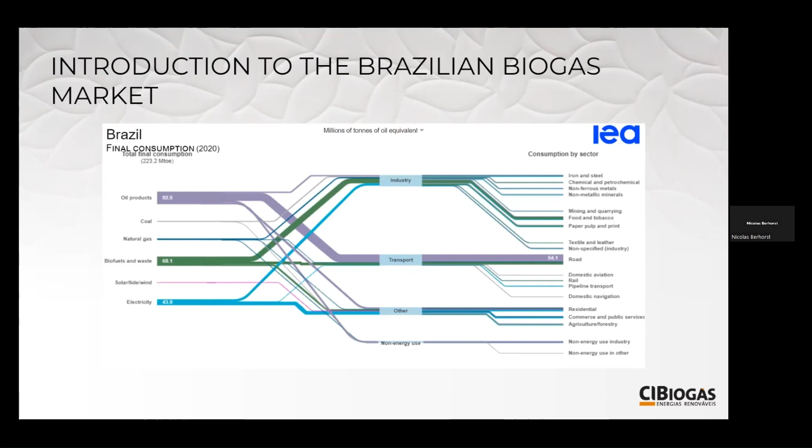And how does biogas fit into all of this? These are some pictures of the biogas outlook that CIBiogás has produced, also available at the BiogasWorld website. Last year, 2022, in comparison to 2021, we've seen a growth of 15% in new plants and a growth of 22% in biogas volume. Where are these plants mostly concentrated?

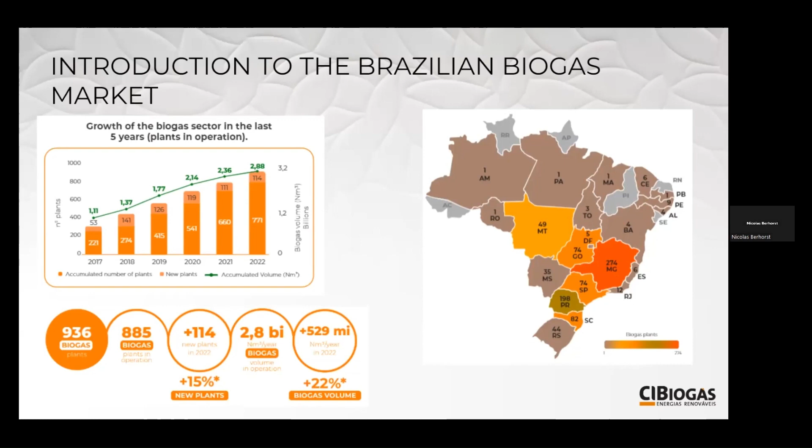They are mostly concentrated where Brazil produces its protein - south, southeast, and center west. On this slide I'd like to show some profile of those plants. Please check the slide on the right, the green one. The first bar, dark green, shows the quantity of plants, and the lighter green shows the volume of biogas produced. Looking at opposite sides, on one hand we have agriculture, which represents almost 80% of all the quantity of plants in Brazil, but counts for only 10% of the total biogas volume produced.

And on the other end, we have sanitation, mainly municipal solid waste and wastewater treatment plants, which counts for only 10% of the quantity of plants, but roughly 3/4 of the whole volume of biogas produced in Brazil. And in the middle, we have industry, and I would like to highlight this sector.

This is where CIBiogás believes we will see the most accelerated growth in Brazil, mainly in food and beverage companies and the sugar ethanol industry, where we use sugarcane crops to produce biofuels and sugar, plus other plants like slaughterhouses or enterprises that produce organic residue. This middle segment, 12% of quantity and 16% of volume, we expect to see accelerated growth both in quantity and volume, due mainly to the type of stakeholder.

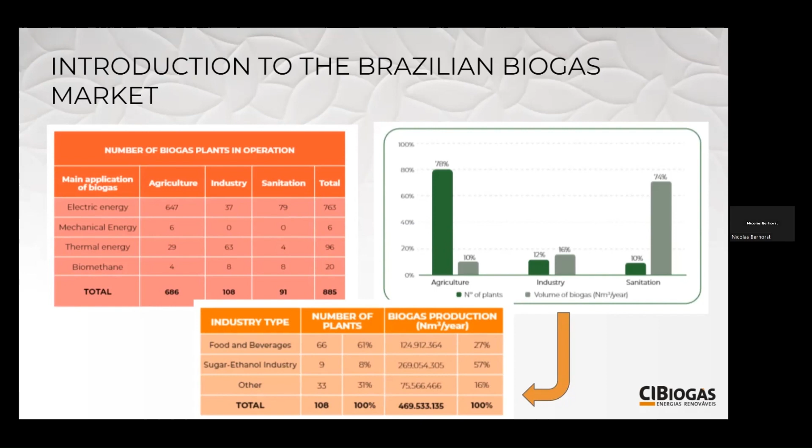Next, I bring some strategic importance to the biogas chain in Brazil. When I talk biogas, I mean the whole derivatives: biomethane, hydrogen, methanol, airplane fuel, hydrocarbons, fertilizer, etc. These are some main key points: portfolio diversification, new income, new exports, competitivity, dispatchable energy, energy security.

Sometimes in Brazil we suffer from drought, from lack of rains, and we suffer from power shortages. The Paris Agreement targets methane emissions, and mainly we have a specific public policy for methane emissions. And also keep in mind, we are the... oh, now my video is back.

Hello everyone. So keep in mind, Brazil is one of the largest protein producers in the world, so methane emissions from this sector is something very important to be taken into account.

We're also talking about import substitution and price fluctuations due to the international market. We import almost 100% of our phosphate fertilizers, and we also have an important share of imports from Bolivia of natural gas and also liquefied natural gas.

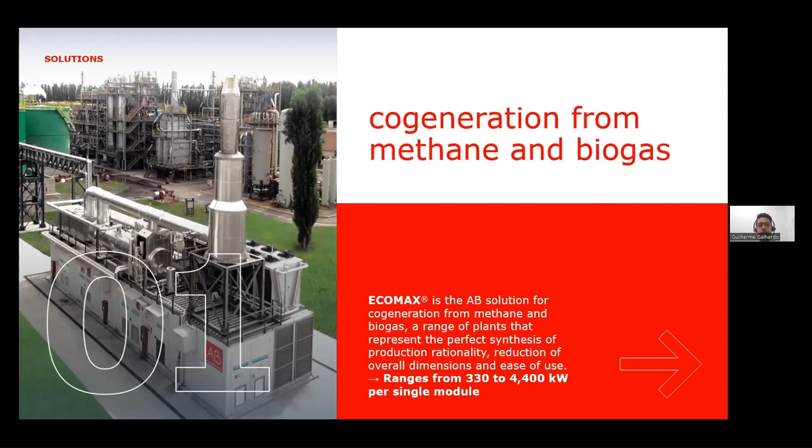Just going fast into our solutions, we have two types of solutions for the biogas market in general. The first one, which is the one we started with, is cogeneration using engines that run with biogas. In this solution, we go from 330 kilowatts up to 4.4 megawatts for a single module, and of course we can configure and use the modules according to the needs of the customer.

As it is a very plug and play solution and a very simple solution, we can install it according to the needs of the project. We can basically do it with whatever gas you have - natural gas, biogas, landfill gas, and also some special gases. Here in Brazil, as I said, we already have a lot of experience using biogas, especially landfill gases.

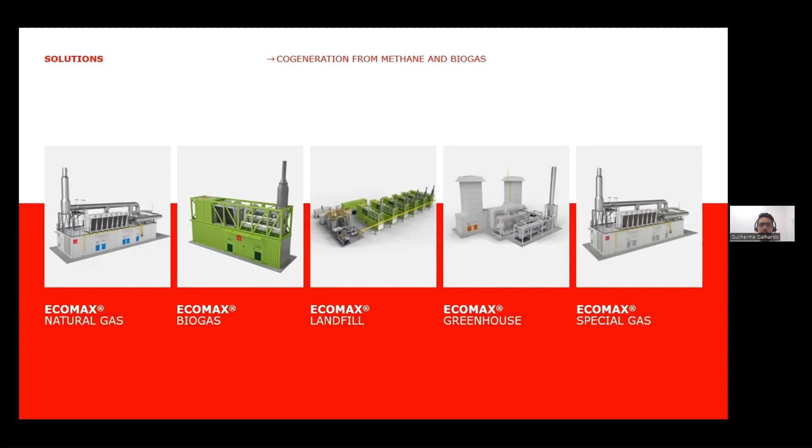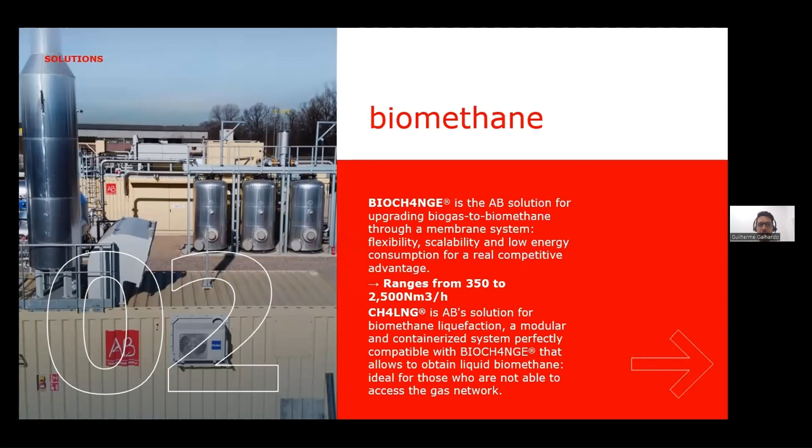In the past years, we used to say that we worked with solutions for energy generation using biogas, but now we say that we work with solutions for the utilization of biogas, because besides energy generation, we also have upgrading systems. So basically, AB is a company that can support you in the complete project, even if you want to use the biogas for energy generation or for biomethane production.

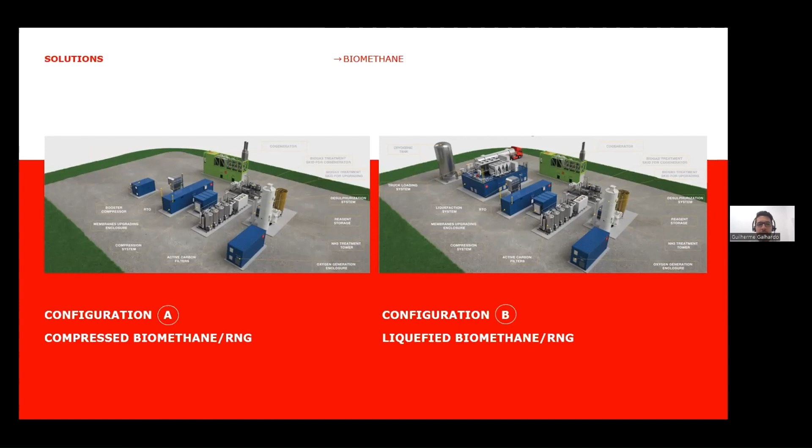We are basically, and we like to say, a one-stop shop. So wherever you need biogas utilization, we can, in one way or another, supply and make a project for you. Besides the supply of equipment, of course, there's a very important part, which is the operation of the systems.

Just as an example, we have it worldwide, but here in Brazil, 100% of the projects we have installed have full service agreement contracts with the customer, where all spare parts and all maintenance, all services, are included in this contract. We have the team available 24/7 to the customer.

Whenever you need, we're there and we can support. And into this contract, we have a minimum availability of the systems - it's an availability warranty that we supply just to make sure to the customer that the engine or the upgrading system will run according to the needs of the project.

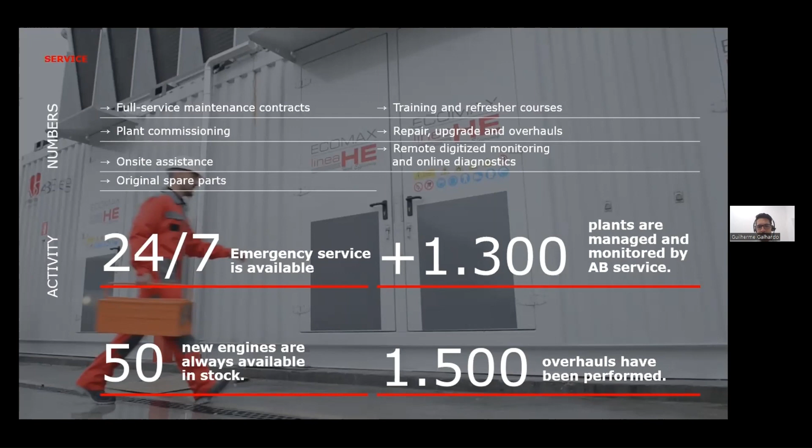So basically, this is just a short, very short introduction. Going into the challenges and opportunities, I think Nicolas explained it in a very good way, and we just highlighted some points here that we see. This is mixed between energy generation and biomethane production in general. In Brazil, when we talk about biomethane, this is a kind of new thing right here - the projects have been developing more and more in the past 2 years, I would say.

One big challenge for this market is the infrastructure for transport. You have the feedstock, you have everything, you have the technologies, but sometimes you are producing the biomethane, but you cannot transport it, or it's very expensive because you have to compress it or liquefy it.

If we take a look at the experiences we have in Europe, basically all the installations are very close, or they are just beside a gas network, so it's very easy for you to connect the biomethane and transport it.

We don't have as good public policies and incentives. This is something we need to develop. And as Nicolas said, the ones we have are not applied. So this is a big challenge for us.

Morning, everyone. Thank you very much, Brian. Sean, yeah, you will need to click on reading view on your left side. Meeting. Yeah, reading view. One more. Oh yeah, I'm sorry. Okay, here we are. Wonderful, you're good. Okay, thank you very much, Ryan.

Thank you very much to Biogas World for this opportunity to present Bauer to everybody participating, and thank you very much, Nicolas and Guilherme, for your presentations. Very quickly, Bauer Compressors is a German family-owned business based in Munich, Germany. In Munich is where we manufacture the actual compressor blocks themselves. We've been manufacturing high pressure, mid pressure, and low pressure compressors for the last 80 years. We manufacture everything from breathing air compressors to nitrogen, hydrogen, CNG, biogas, and biomethane compressors. Our very first experience in the biomethane, biogas world was in the early 1980s in Europe.

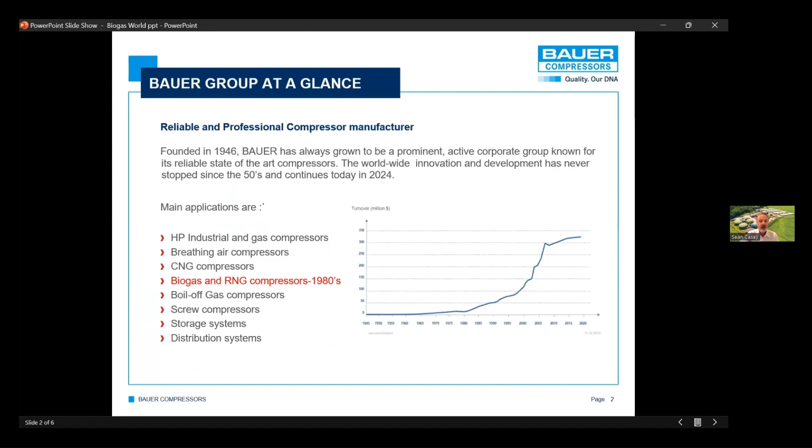And with that experience early on, we've been able to incorporate and accompany all of the changes, all of the evolution throughout the European market. And in the last 4 or 5 years, we've seen a huge uptick in the North American market. I report to Bauer North America, which is based in Norfolk, Virginia. And so we are very busy in our American office right now with a tremendous amount of projects throughout Canada and the United States at the present moment.

As I stated, all of our compressors are made in-house, so we're able to offer and provide a single source responsibility from a manufacturing perspective. We actually manufacture the compressors and we package them according to the customer's requirements.

Americas is responsible for the Brazilian market. I'm the general manager for Bauer for Latin America. I'm based in Mexico right now. I was based here in Brazil for 13 years, but now I'm in Mexico, though I do spend quite a bit of time in Brazil at the present moment, trying to position ourselves for the opportunities. All of our manufacturing is completely vertically integrated, and as such, we're able to fully guarantee and supply and warrant the post-sales support and all the technical support, lifetime support required for the proper operational excellence of the equipment that we manufacture and supply to the customers.

Within the biogas, biomethane world, we've got 3 primary spaces where we participate. The first is in the biofeed gas compressor side. This would be where we would feed the actual biogas to the purification processes, primarily membrane and PSA, where we're very busy right now. We can start as low as 40 cubic meters per hour up to 3,000 cubic meters per hour in flow.

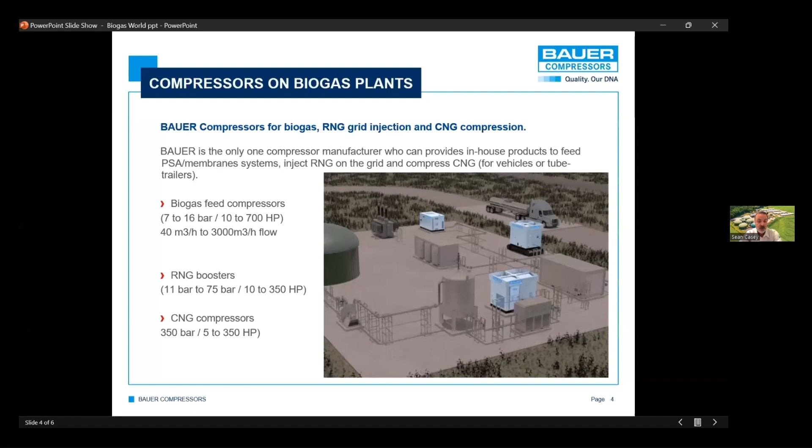Some of the challenges: we believe the marketplace requires more financial incentives, further legislation required to foment fiscal incentives, where we can actually make biomethane scalable. And when you make it scalable, the cost typically reduces, and the exposure and availability of the gas expands at scale. We think the market requires additional lines of financing other than from the BNDES, the Brazilian National Social Economic Development Bank. I look at similar sectors in the Brazilian economy right now as other industries with a lot of PPPs, public-private partnerships, which tend to be fairly successful, a mix of private and public investment. I think if we could do more of that with regard to the biomethane market, that would help tremendously.

We see a few technical challenges.

One of the things that we encounter in a lot of our day-to-day activity is the lack of an independent mid-scale EPC experience in the engineering, procurement, and construction of the upgrading facilities themselves. It's pretty much left to individual specialized companies who are all trying to sell their equipment. But with an EPC, you tend to specialize more on the actual technology itself rather than the specific product. Brazil has a very rich experience with EPCs in the conventional oil and gas world, so we think if we could see more EPC development in the biomethane sector, that could potentially help.

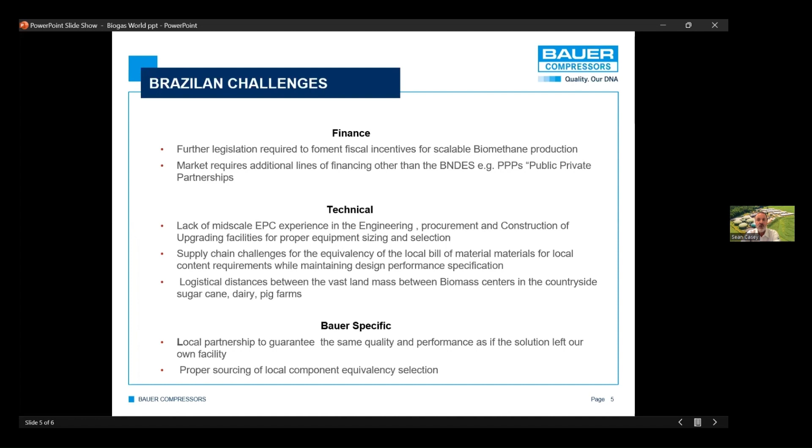Somewhat on the opportunity side, we see some big opportunities for biomethane. I'm not sure if my information is the latest up to date, it's what I could find on the ANP website. Currently we believe there are 6 large plants in operation in Brazil, producing about 62 million cubic meters of gas annually, and there are 11 large plants awaiting final approval from the ANP for implementation.

We see immediate opportunity there for companies such as Bauer to participate at 3 different points. One would be the feed gas, passing the biogas off to the purification processes, whether that be membranes or PSA. There's a lot of talk and focus on the sugarcane and landfill wastewater markets, but we're actually looking at it from a different lens ourselves.

A lot of the applications the US has developed in the last 4 years were heavily geared towards dairy farms, and I know Brazil is a very big dairy producer. We're in the process right now of trying to understand the scale of the dairy production, whether they be cooperative based, but a lot of the European upgraders, that's the first thing they ran after in North America — the dairy opportunities. So with those recent application successes, we're looking at that here right now in Brazil, and we see that as an opportunity for us.

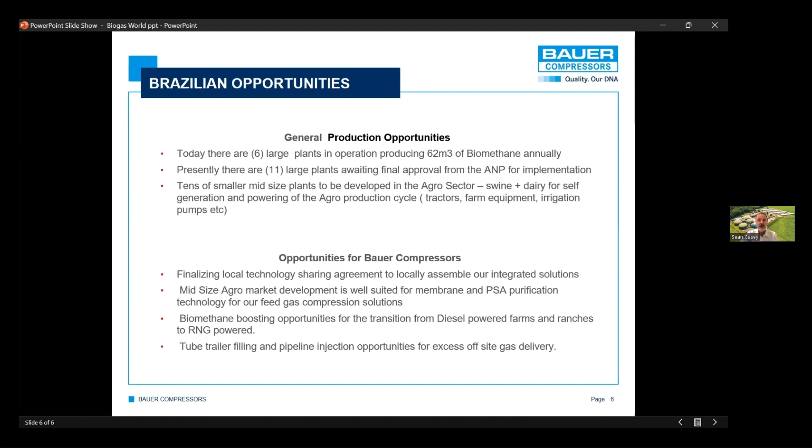Some of the other applications or opportunities we see for Bauer — one that's really important to us right now is to finalize our partnership with a local build company where we can start to offer our solutions locally. The mid-size agro market is well suited for membrane and PSA purification, whereas a lot of the landfill applications are different types of technologies where Bauer itself wouldn't necessarily participate, like water wash and other types of applications. Again, the biomethane opportunities, the transition from diesel to biomethane on the farm, I think is a very interesting opportunity for us as well.

Okay, I'll be even quicker now. So my name is Sérgio Cruz, I'm the general manager for Paques here in Latin America. Quickly on Paques: Paques is a worldwide leader in anaerobic reactors for wastewater treatment. Our headquarters are in the Netherlands, and we have units besides the Netherlands which attends Europe. We have Brazil, which takes care of Latin America, USA in Salem, New Hampshire, which takes care of USA and Canada, India, which takes care of India and Middle East, Kuala Lumpur, who does the Middle East, Southeast Asia, Asia Pacific, and China, doing China. So we're all over the world, almost 500 people. We have done business in 60 countries, and we have over 3,000 references worldwide. And today we belong to the SKion Water Group, which is the same group that owns Ovivo, which is a familiar name to you guys in the United States. I'm based here in Piracicaba, which is about an hour and a half from São Paulo, Brazil.

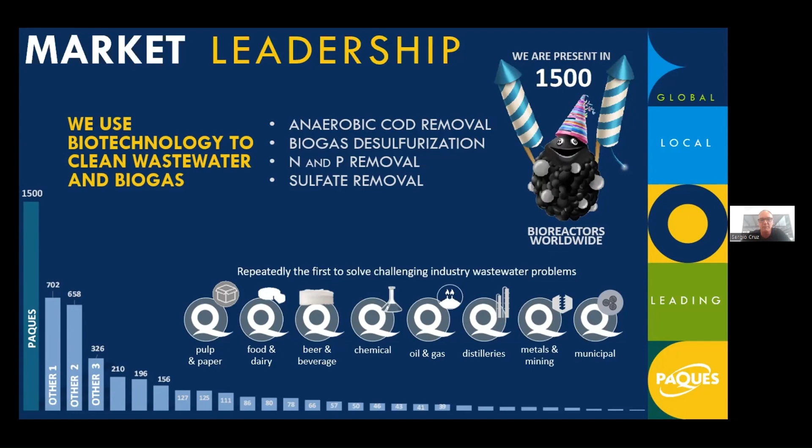So what do we do? Paques uses biotechnology to clean wastewater and biogas. We use, in all our technologies, bugs like anaerobic bugs, Anammox bugs, Thiobacillus, and these bugs do the work for us. Our main business is anaerobic COD removal. We have over 1,500 anaerobic reactors worldwide, being about 300 of them here in Latin America. We're very big on biogas desulfurization as well, about 350 biogas desulfurization systems all over the world, maybe 12 or 15 in our region. Nitrogen and phosphorus removal, sulfate removal. We are in all sorts of different sectors, mainly food, dairy, beer and beverage, pulp and paper, chemicals, and so on. So that's what Paques does.

Quickly on the two technologies that we use for biogas. First of all, of course, biogas generation, especially when we're talking about biogas from semi-solids or high solids concentrated effluents. We have the CBD, which is kind of a CSTR but with a lot of advantages. First of all, we're able to remove the solids that otherwise would accumulate inside the reactor. We have a very unique mixing system; it's actually a plug flow reactor, and we have a very unique system to avoid the formation of scum. And we have an external way of sending the biomass, the sludge, back into the reactor, so we can work with a higher upflow velocity and higher VLR.

So this is our CBD reactor, which we use to generate the biogas. And then we have the

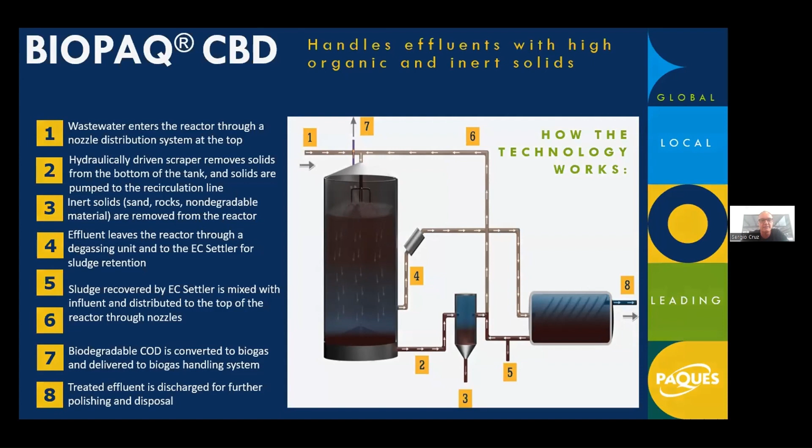THIOPAQ, which is a technology to remove the H2S from the biogas. Basically, it's a scrubber. But besides the scrubber, we have a reactor where another bacteria takes care of it. The H2S is removed from the gas in the scrubber and into the liquid phase. And then in the reactor, we take the sulfide into elemental sulfur. So you not only remove the H2S from your biogas, but you also generate a clean, pure sulfur, which can be used as a fertilizer, or used to manufacture sulfuric acid and stuff like that.

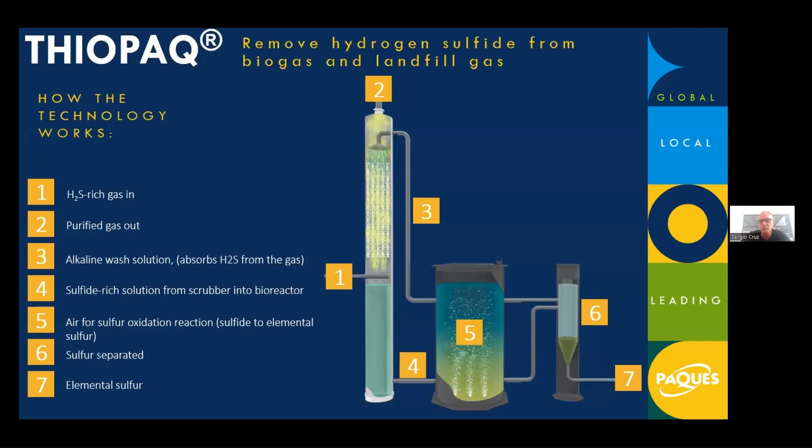So we like to use biotechnology, and we like to generate revenue for our customers. So most of our technologies do that. We generate biogas by cleaning the wastewater, and we generate sulfur by cleaning the biogas.

But enough about us. Let me quickly show what we've done in Brazil. I'm going to show quickly 4 projects out of the 7 or 8 that we have. These two, first one on the left-hand side is a landfill. This is a THIOPAQ to remove the H2S.

So in this particular case, we have 7,200 cubic feet per minute at 1,000 ppm. We've been running this for about maybe 6 years now.

The second one on the right-hand side is a distillery. And most of our projects are in the distilleries. I think you've learned already that the distilleries are the main source of biogas in Brazil. So this is a much bigger project. We're talking about almost 7,000 cubic feet per minute at a 20,000 ppm of H2S.

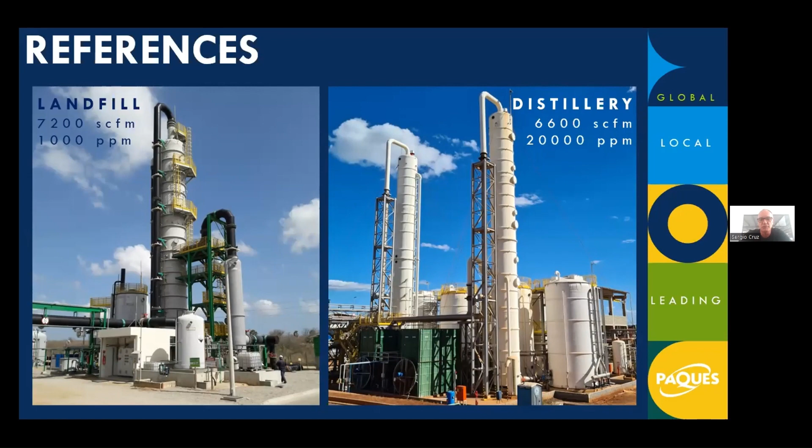We have these 2 other projects, also distilleries, 5,000 cubic feet per minute and 3,000 cubic feet per minute, 23,000 ppm and 12,000 ppm. So the biogas from distilleries, since there's a lot of sulfate in the process of sugar manufacturing, the ppm is always high. It's always above 10,000 ppm, 15, mostly around 20,000 ppm. So we've been around for 12 years here in Brazil.

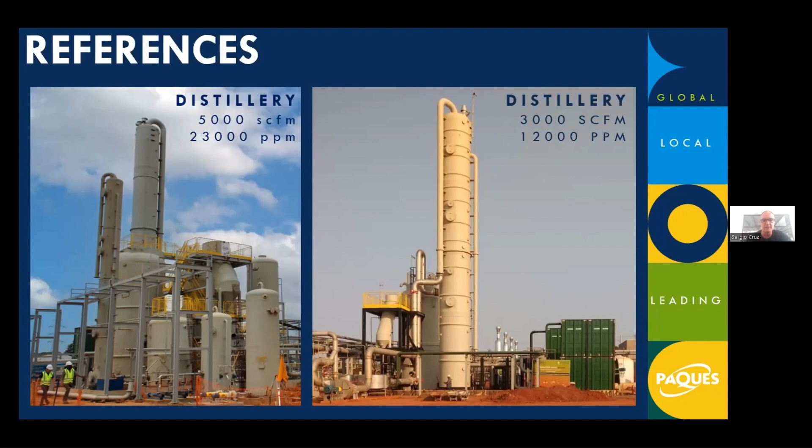We have many projects in wastewater treatment, and in the last 4 years, there's been a boom of biogas. We have, as mentioned, maybe 7 or 8 big projects. We have tens, maybe hundreds of very small projects. We're present on 6 or 7 of these big projects, and we see the business grow as we speak.

I did some number cranking. I've seen that it's about 800 billion in the USA for biogas, about 500 billion for biomethane. So that's where I did my math. So the potential here is about twice the potential you see in the US, just to compare.

But about half of this comes from ethanol, from sugarcane, using vinaça, which is a byproduct of the distillation process, to generate biogas. There's also the use of filter cake, which is a solid leftover, to generate biogas. Some ethanol distilleries are doing that, some are not, but that's a big sector.

There's also a big opportunity from animal protein. Agriculture and sanitation is much smaller.